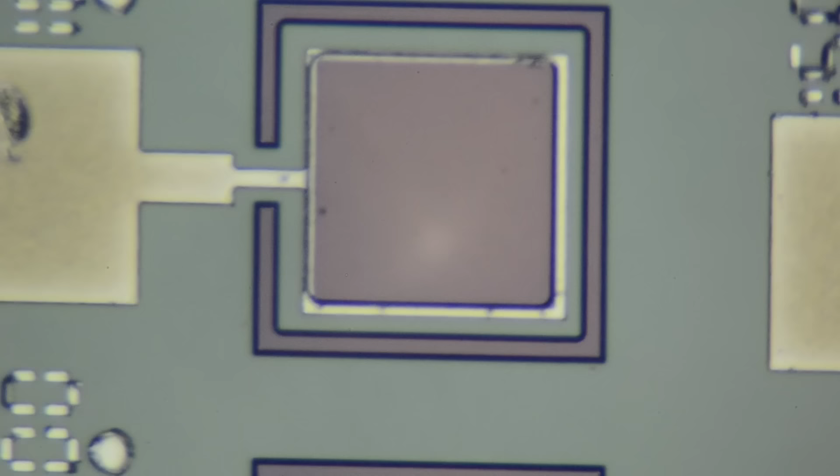What is the specialization Semiconductor Devices and Technology? The specialization Semiconductor Devices and Technology is about semiconductors and the devices you can make from them. So a lot of transistors, diodes, chips.

Can you explain what a semiconductor device is? Okay. Well, I think a semiconductor device is an electronic component. So cables come out, and in there is a semiconductor. So it's a class of material that doesn't conduct well, but you can modulate how well it conducts. It's very easy to make the semiconductor insulate or make it conduct, and as such you can make it switch.

And for instance, in a diode you have only two wires coming out, and current can only run in one direction, and it does not go in the other direction. So in that case, the semiconductor is telling the current, you can only go that way. So that is one example.

In a transistor, you can make the current flow, or you can break it open and stop the current. So the transistor will switch from on to off, on or off. And other materials can't do that. It's just the semiconductor that does it. So everything we want to do with switching or directing current, we do it with semiconductors.

Yeah, it's both a bit about how do they work and how can we make them and how are these things intertwined. To me, I'm discovering like, holy shit, this is how it works. It's amazing. That's the joy in semiconductors. It's a confused material. It doesn't know what it wants, but once you give it some direction, it does everything from phones, computers, biomedical, space.

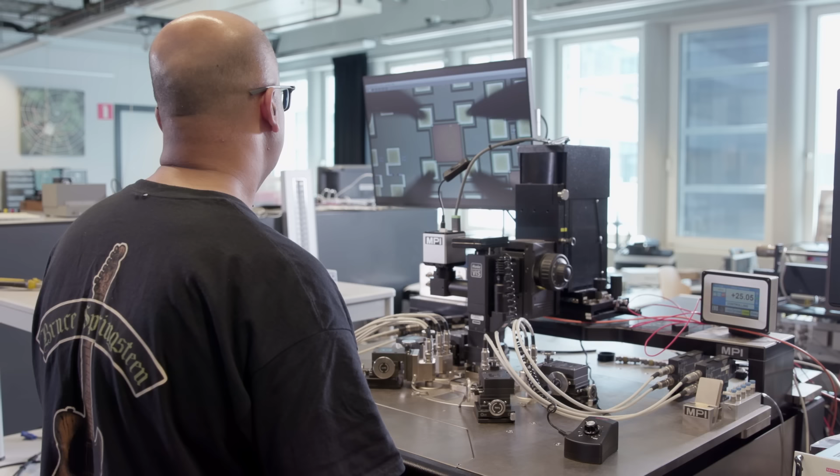For instance, sometimes you want to do a transformation, like when you charge your laptop or your phone, you want 5 volts, but 220 volts come out of the wall plug. You convert the AC signal to DC signal, and you convert high voltage to low. This you can do very well with semiconductors, and it's very difficult to do otherwise.

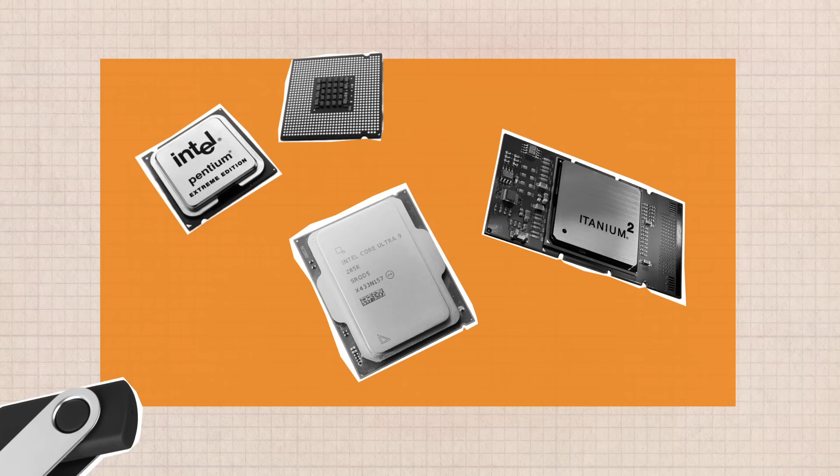So other examples are microchips, the microprocessors, I should say. The chips that do all the number crunching in a computer, that do all the calculations, like the Pentium or the Itanium and all these very smart chips that Intel produces. Also the memory chips that are in USB sticks.

When students follow this program, they will find out all the ins and outs about how a transistor is put together, how a solar cell works. And they can make one themselves. They actually can use our laboratory to make such devices themselves and find out if they work or not. That also sounds like quite a unique selling point, that the students already can go into the Nanolab.

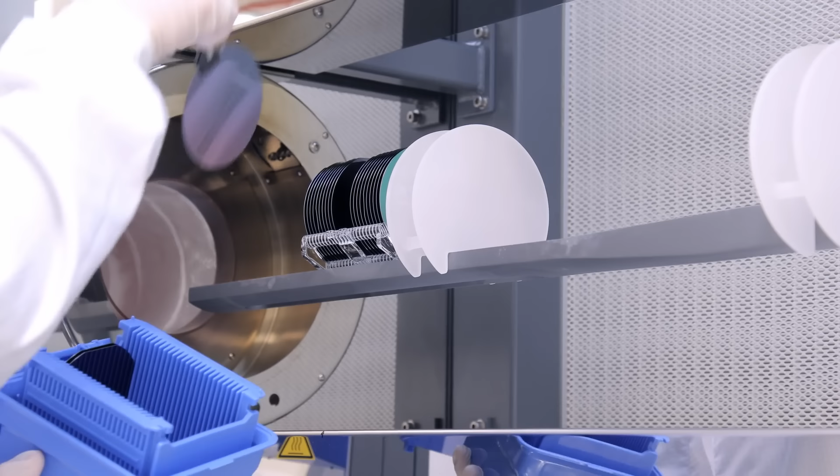Yes, I think there are three or four places in Europe where you can do a master's study and actually make devices in a clean room facility. Because these clean room facilities are usually quite secluded. So only specialists may go inside, and the students are usually kept outside of the laboratory because the equipment is expensive.

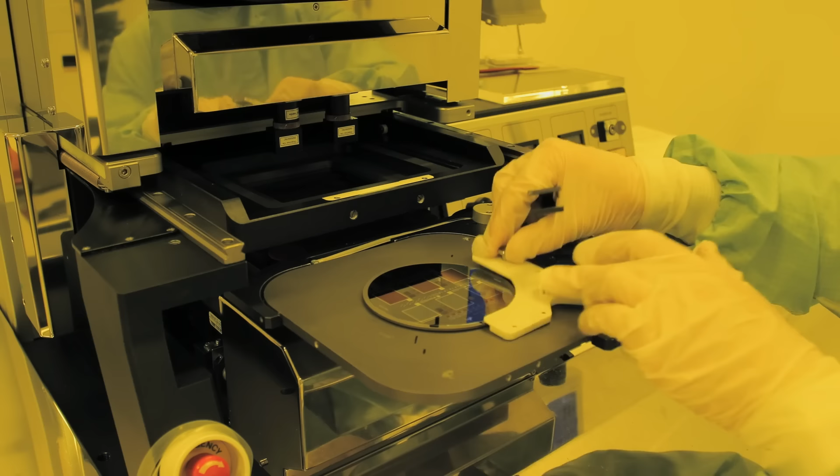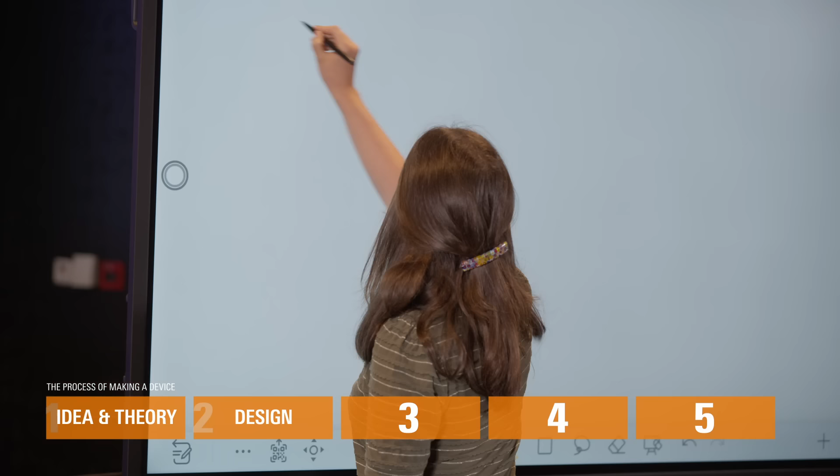Let's act like we want to make a device. We go in a very methodical sequence. So we start from an idea, we look at the theory behind it, we then make a design. And then you'd start drawing your process flow with all the detailed steps, also everything that's needed for that one fabrication step, the sub-steps, and you see, oh, this we can actually not do, or that we can.

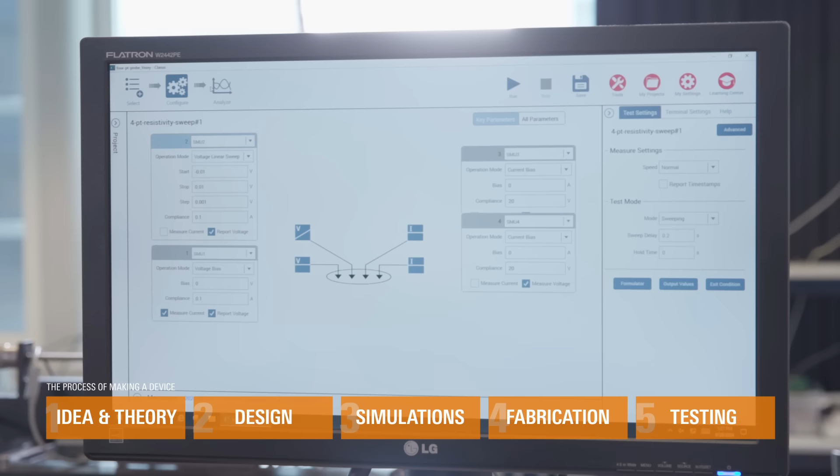We try to estimate beforehand how the design will perform, for instance by simulations. So we can do electrical simulation, optical simulation. Then we make it. You go into the clean room and try. And then we test if indeed it performs the way we thought. It's usually not everything in one thesis; usually you get part of the steps, or there's a really specified type of thing you have to make, such as the design part is a bit shorter, or you really simulate something very well.

There are four compulsory courses. Two are about design and ethics principles. Those are compulsory for all EE students. One of the compulsory courses is the fabrication of micro and nano devices, where you learn a lot about the technologies that are available for fabrication of chips for semiconductor things, but also for lab on a chip or bio applications, sensors, those kind of things. You learn a lot of the tools, and the course ends up with you getting a picture of something.

Sometimes it has a scale bar, sometimes not, and you have to come up with how you could fabricate it. It doesn't have to be the way it was fabricated, but a way you can come up with combining all the technologies and tools that you learned in the course of how you can actually fabricate the thing, which is quite a fun challenge. Sometimes you feel like, oh, why did I get this picture? Sometimes like, oh, this one actually makes a lot of sense.

One of the difficulties if you make such a thing is that you don't see what you're doing. So one thing we have to teach our students is, first of all, to envisage what you're doing, to make a mental picture. And secondly, which techniques are there to find out what you've done.

And the other one is Advanced Semiconductor Device Physics, taught by Ray Hueting. And he explains in detail how devices work, how advanced, very modern devices work, like a bipolar transistor that is used in cell phones for communication. Or power transistors that are used in modern power circuits, such as the adapter that you use to charge the phone. Those require very special transistors.

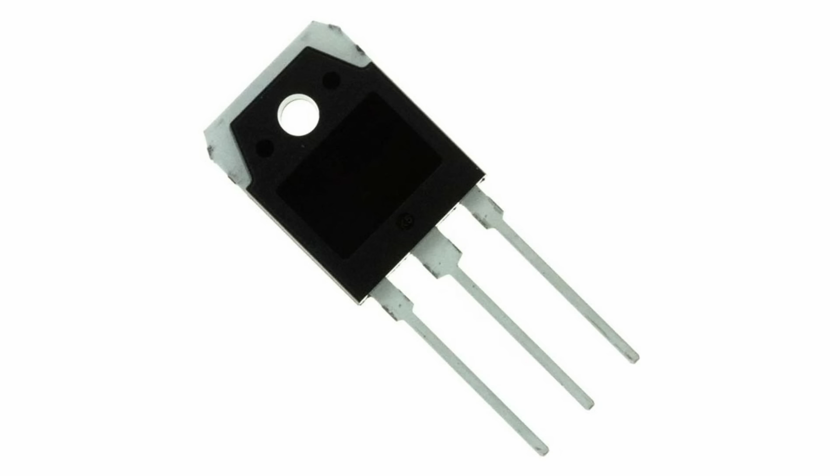The adapter connects directly to 220 volts, and most electronics will immediately blow up if you do that. So they have special transistors in there that can hold 220 volts and even more.

Those are the 4 compulsory courses, but we find it important in the electrical engineering program that you both have experience with more research-like topics and also system design type topics. So we have given a list of courses that are either very research type or very design type, and you have to choose one from that list. Yeah. So those are like half compulsory, because there is still a choice. That's 5 plus 5 again.

One is Measurement Systems for Mechatronics. It's a more system approach course where we talk about a complete measurement system, how to put that together, how does it work, and especially we focus on the instruments in a measurement system that do the measurements themselves. It can be a photodiode or a gyroscope or an accelerometer. We discuss how these components work, and how you best employ them in a system.

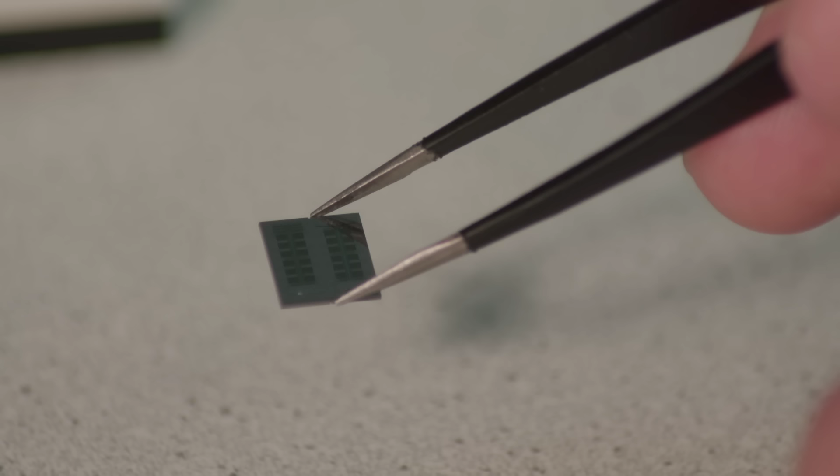You have Micro-Electromechanical Systems, which goes really into the sensors and the mechanical parts. And you actually design in the group your own micro-electromechanical chip, which is fabricated, and you measure it. And the great virtue of that course is that you actually design one of these MEMS devices using the real design environment that you will also use in professional life. Then it is produced in the Nanolab here in Twente, you get it back from the laboratory, and then you can test if your idea really works.

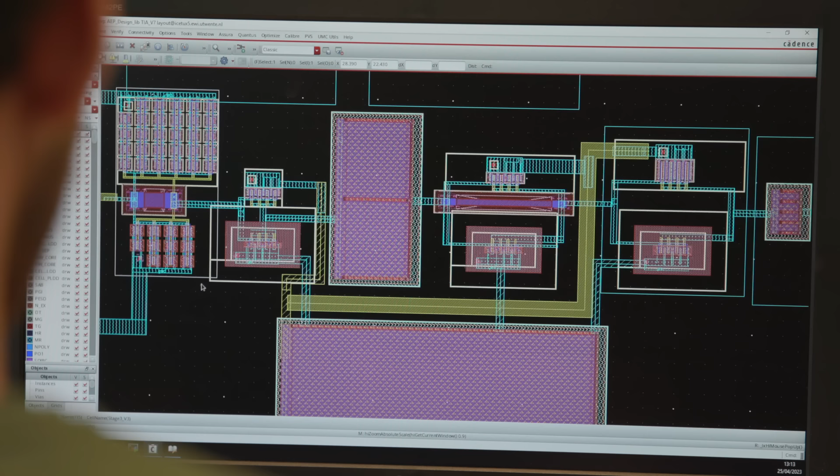One course that is 10 EC that is very attractive to take is called System on Chip Design. And there you learn more the system architecture of a chip or a combination of chips. And you do that with practical exercises, with real life experiments, and also from theory.

There's also, I think Jurriaan will talk enough about that, but with the semiconductors you can also go more in the solar direction, which actually in that course they don't go deep, but more into application. But I think there will be some more new courses. I expect Jurriaan to do that because it's his new field. He has kind of changed his field, from reliability of computer chips to solar.

We teach how to harvest solar energy, how to convert solar energy into more useful forms of energy, for instance, electricity or heat, that we want to use in daily life. And of course, the solar cell, as we use it in photovoltaics, is an important component. So I spend several hours explaining in full detail how a solar cell works and how we try to produce it in such a way that it's maximally efficient.

Until about, I think, 12 years ago, solar cells were always made in the same way. But then suddenly people came up with new ideas how to make a solar cell differently. And then suddenly, every 3 years or so, people make solar cells in a completely different manner. The level of installed capacity for solar cells is now, I think, 1 terawatt or 1.5. But we need to grow further up to 20, 30, 40 terawatt.

If you look around in the city where you live and you see solar panels on the roof, you have to realize that actually we need about 20 or 40 times as many solar cells everywhere, in the field, on the roofs, on the industry roofs, everywhere. And then we satisfy the need for electricity.

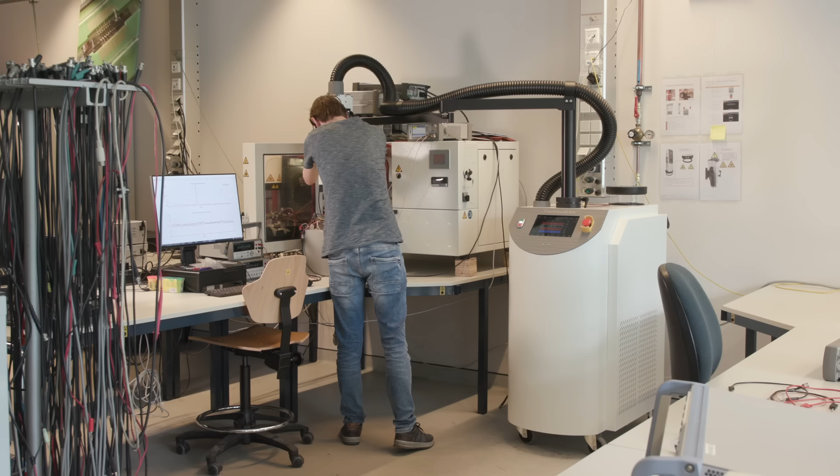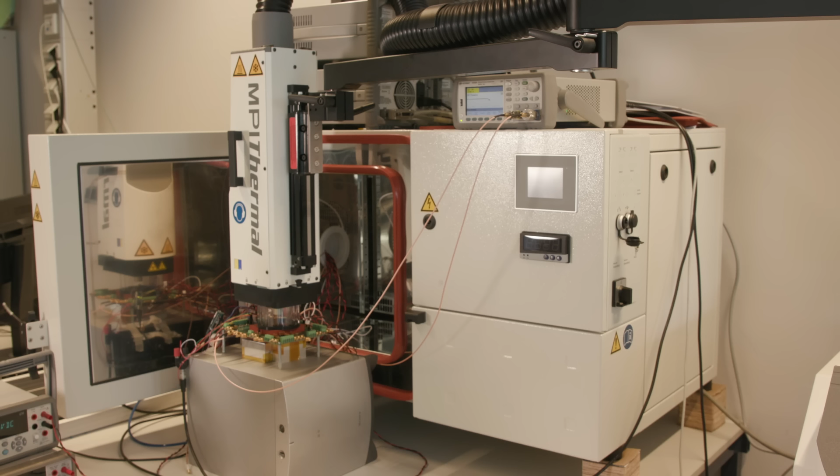And we expected that at some point the RFID tags would not answer anymore. But it was different. We found that if you heat up the RFID tag a little bit too much, it starts to give wrong numbers. Oh. And that was really problematic, of course, because the whole idea of the ID tag is that it will give the right ID. So you don't want it to give the wrong answer.

And then you are at 30, so the other 30 are basically completely free. So students can choose from the entire offering of the University of Twente which courses they want to take. And because we work together with TU Delft and TU Eindhoven in the Netherlands, you could even take courses there.

And what are some of the electives that you liked the most in your studies? Ooh, the electives that I like the most. That's a good one. I really liked inorganic material science, which is from another study completely, so perhaps I should go for another one.

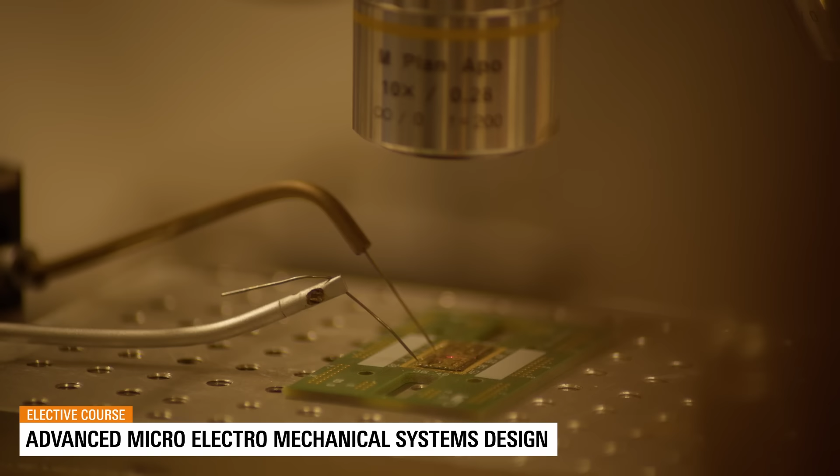I really liked, I think, the MEMS one. The MEMS course I really liked, also including the advanced MEMS part, where we got to design a micro electromechanical system which was fabricated. We could measure it, but we also did some simulations on it in the advanced part. And it was really nice to get something hands-on: hey, we designed this, it's actually there, we can measure it. And this was one of the courses where you got a lot of practical insights and real life experience already in that first year.

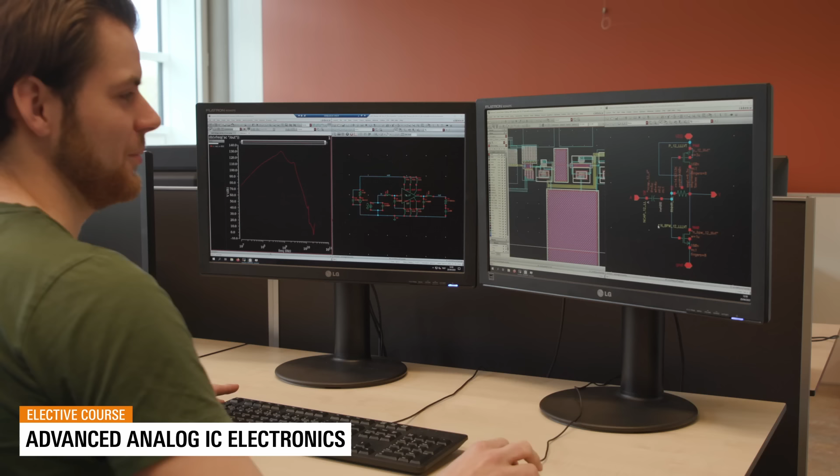Another course I really liked was Advanced Analog IC Electronics. It's from the ICD specialization, where I gained a lot of simulation experience for circuits, and it's about designing the chips that in our specialization you learn to fabricate. So I think that really complements well, and I think you learn also a lot about the trade-offs and why you would like to achieve certain things in your fabrication process and which ones are more important, which ones are less.

Are there courses that you really, really like that we haven't talked about yet? Well, I know that my students really, really like the course on superconductivity. And it's interesting because electrical engineers usually don't use superconductors. But of course, conduction for electronics is the most important thing there is. If no current flows, then you cannot make anything. So of course they have a generic interest also in superconductivity.

Students can choose a bunch of electives that are related to optical devices like lasers and LEDs and photodiodes and also solar cells. They could also choose to learn more about circuit design, so they can take electives that have to do with the design of chips rather than the manufacturing. But they can also take a mix. They can just follow their curiosity. But the list of courses that we give, where they have to choose one, is actually a very good list of topics. Basically, all those courses are recommended by us, otherwise we wouldn't put them on the list, right?

I just started doing some courses for the master that I liked. And at some point after the first quarter, I was like, oh, officially I have to discuss my actual program with program mentors by now. But I was still doubting a bit because I liked everything that was a bit physics or chemistry related. I started with the program mentor for the group where I did my bachelor thesis, and he was very kind: oh, you can always choose later on, it will be fine. So I just continued doing courses. I went through the list of all courses for the EE master, highlighted everything that seemed fun, and compared that to the compulsory courses per specialization.

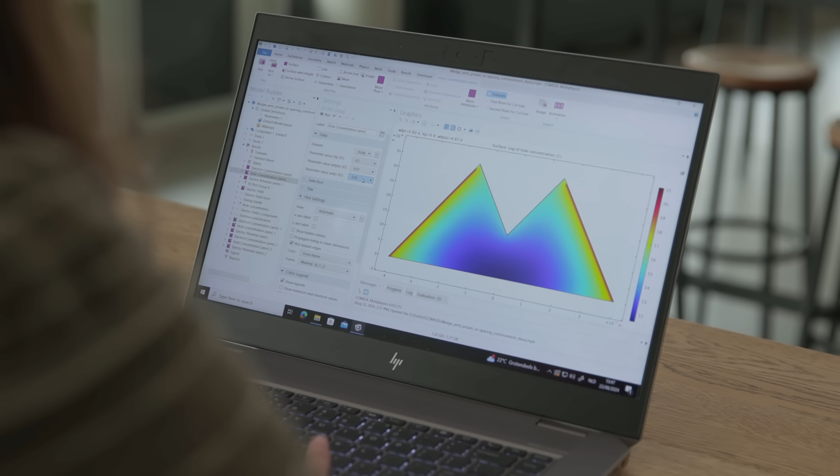Self-aligned is also relevant because we of course all know ASML and the lithography steps nowadays, but the machines that can print the smallest patterns are so expensive that only a few companies can buy them. And if you can make sure things align themselves, you need fewer lithography steps, and you can also make more interesting shapes, and that can actually be relevant and useful for your device.

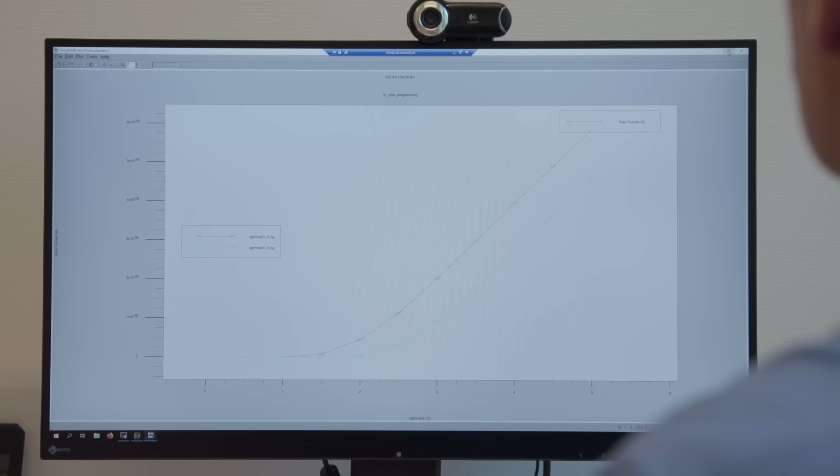So some master thesis projects are focusing on understanding components better by using simulations and understanding theory. Other assignments are much more experimental, and that can go two ways. Typically, either you go into the laboratory and make something new, or you go into the measurement room and try to find out how it works and why it works this way.

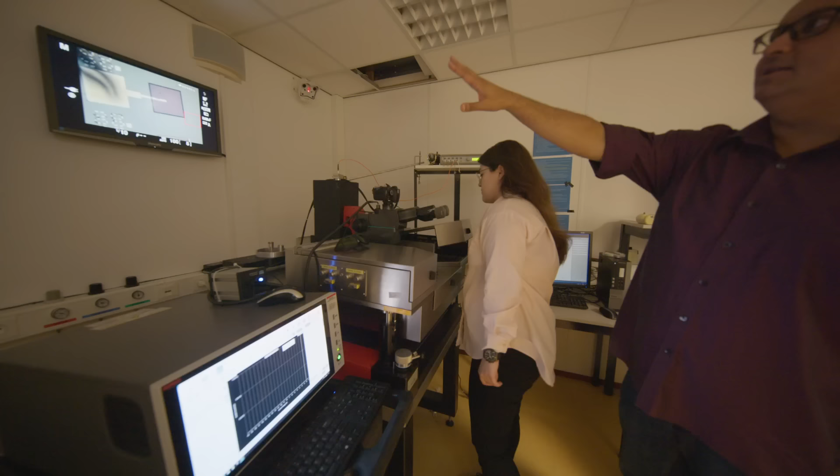Now, in that process, you get supervision. The students typically talk to their direct supervisor at least once per week to discuss the progress and the plans. But also, when you go into the laboratory, there will be an engineer who can supervise you, train you on the equipment and show you how things are done. Not only to be effective and proficient, but also to work safely. That is important to me as well.

Yeah. Of course, University of Twente is really a technical university, so we train a lot of people for industry jobs in the end. I think there's quite a variety of what people go and do. And I'm not really sure what I'm going to do yet. So if you get into designing devices, then all my friends sitting in the background do all the designing of devices. That's the name of their group.

Another field would be to actually engineer materials that will go into devices. So how do you grow them? How do you control them? How do you precisely increase their yield? How do you make more efficient, reliable devices? And then you can also go into companies where you're characterizing these devices. When you make something, how do you know if it actually works? How do you know if there are any defects in it?

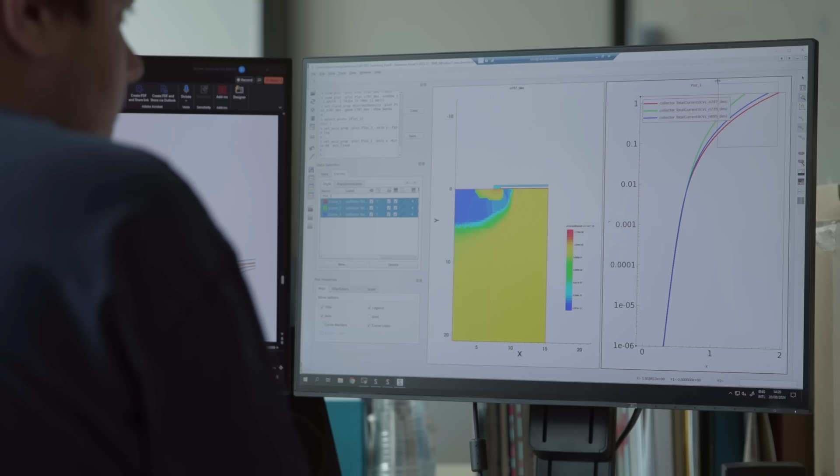I wanted to transition from being in the industry to getting into more fundamental research in academia. Just go back to making something that's much earlier in the phase, where I have a bit more time, a bit more patience, more like an exploring mindset.

I think the freedom of electives and being able to choose the courses that you like, and also finding your way while doing the courses, which are the things you actually really like. And I think also during a thesis, when you're trying to make stuff work and it doesn't want to work, and you read a lot of papers about people that tried other things and it did work, but they don't say why. And then at some point you actually do get something to work in the clean room. That's really rewarding once you get there and it does work.

The pure joy that I get is in that search, it's in the hunt. When we find the answer, when we figure it out, I get into depression. It just becomes boring. It's like, we won! Oh, the game is over. I want to play again. I want another problem. So I enjoy that darkness on the edge of town, right? Like what Bruce would say.

I think the teachers are also a really big positive part of the EE program, but also the specialization. It's not a very big specialization, so it's quite easy to go by a teacher and ask something. For example, with the MEMS simulations, there's a person I was doing it with and we ended up sitting in the office of the teacher for an hour, and it was really nice and really useful.